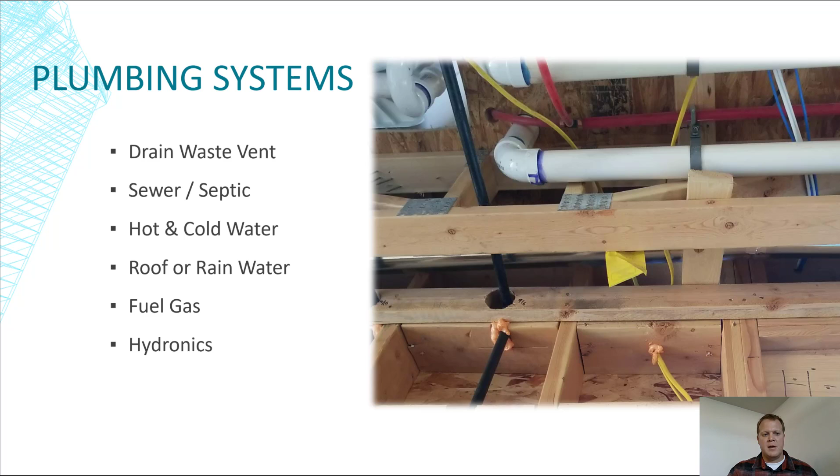I like that. I was watching a documentary about Machu Picchu, and they had a plumbing conveying system, water and waste going carved into the rock. Pretty amazing. Think of European history in college, and some of the stories where they're dumping sewage right in the streets, and sort of like the different pandemics that they had.

Interesting. Anyway, there's a long history of sewage being dumped into water bodies like rivers and lakes and even the ocean, and causing massive problems there. And obviously that's still happening all over the world. And if you're getting your water supply from the same place that you're dumping your sewage, imagine the problems.

But even closer to home, my wife's grandparents, who I love and adore, they're great people. They're in their 90s, and they have stories about having to get water from a well, and using outhouses and things like that, where there was no plumbing in their home when they were growing up as kids.

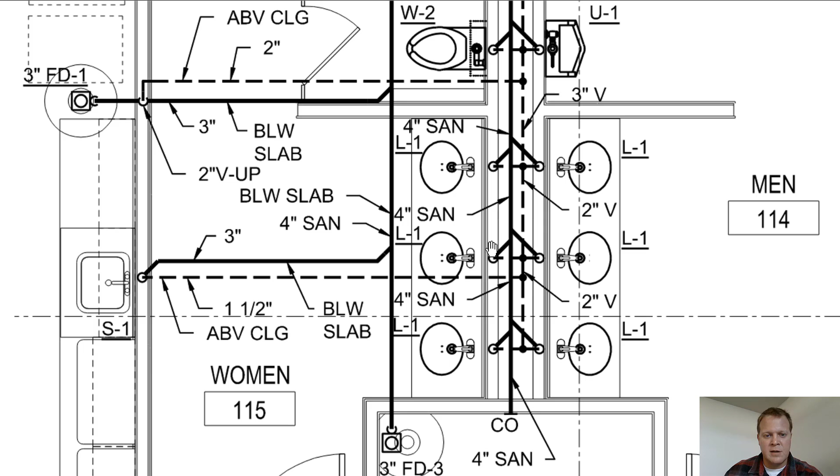And so let's just kind of run through where the highest is. And you see this CO right here, 4-inch sanitary. It does not say that it is underground, so that's above ground right there. And what this pipe right here is picking up is the lavatory, the sink. So the lavatories on each side, and let's try and zoom in on that a little bit. So the designers did a good job of drawing this in, and they spent some time actually drawing each individual little waste line there coming in here.

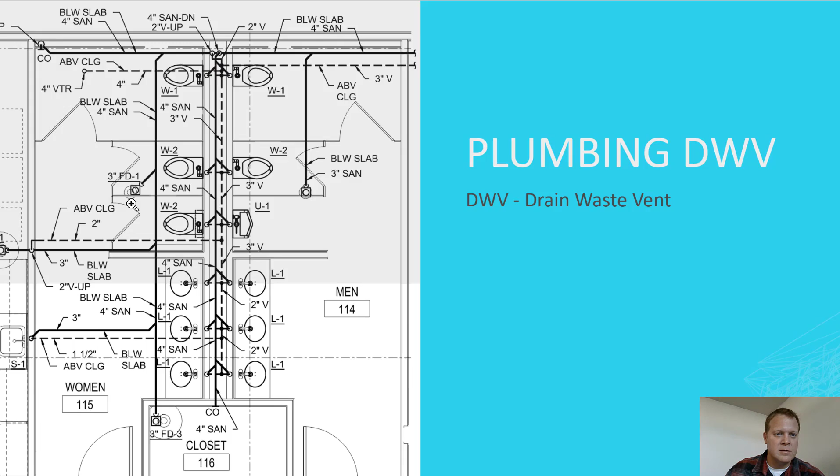And then over here in this area, they have 4-inch sanitary down. Well, that's basically saying that this is below slab, and they actually have it right here. Below slab, 4-inch sanitary. So if this pipe is below slab, this pipe is below slab. They don't have an up or down. And when you look at these drawings, they usually show an up or down, meaning a stack in a circle. And you can kind of see that right here.

So we have this guy right here picking up something. And what is that? Well, they actually labeled it well over here. It's a floor drain, 3-inch floor drain. And then what's this? Well, let's just trace it out again. We got the floor drain coming over here. If it's in the floor, this has got to be below ground. Oh, there's another floor drain over here, and then it's going to come.

So we can tell by the direction of this arrow, and there's other ways to tell, but this is an indicator of which direction this is flowing. So this is the highest part of the pipe. It's going to slope, I think usually a minimum of 1/4 inch per foot, and it could be more. And it's going this way and coming out that way. And it's got lots of different branches. Want to spend a little more time looking at it.

We've got this CO. What is a CO? And it says 3-inch sanitary up. What is that? Well, it's the end of the line, or maybe the beginning of the line might be a good way to say it, but it's a clean out. We could go look at the abbreviation sheet for the plumbing and look exactly what that is, but that is a clean out. And we'll talk about clean outs in a little bit.

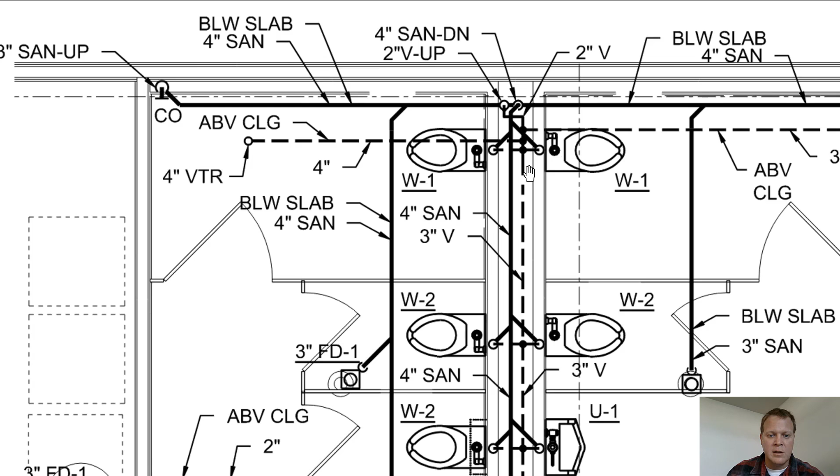This is the highest part. And so it's coming over here. It's picking up this pipe. Interesting, it's kind of hard to tell, but that's the 2-inch V up. So this is picking up some of the vent right there. And we see more water closets or toilets. I can never remember water closet or lavatory. I always get them confused. Those terms don't make any sense to me. So this is the vent.

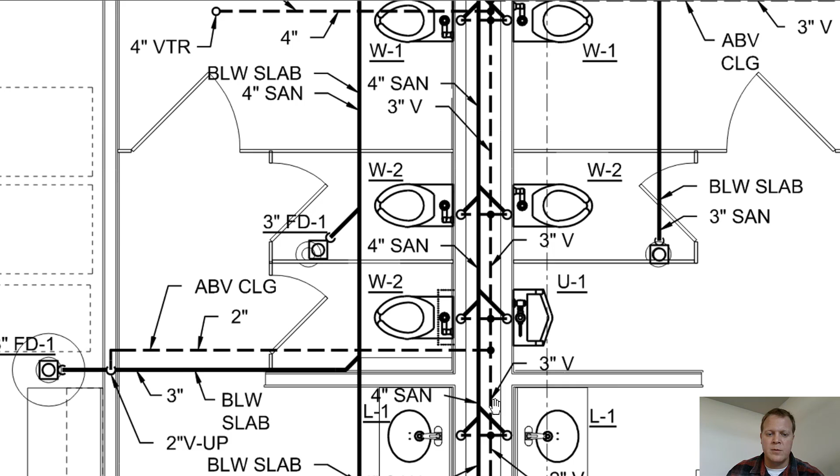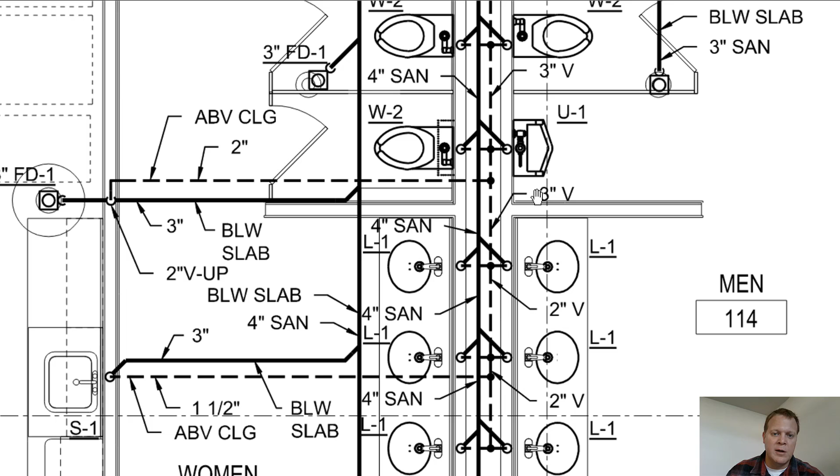So the vent is not carrying waste. Looking through this again, we have the dark line carrying waste, and it's sloped. And this waste line, or sanitary line, as they're calling it, the 4-inch sanitary line, is going to convey both. I'm going to throw a term out: anything coming out of L1, that would be somebody washing their hands, and so that's gray water. And then the urinal would be black water, but they don't have separate pipes for gray water versus black water, so they're just calling it sanitary.

All right, so what does a vent line do? Well, first thing it does is it vents the sewer gas from going into this space, and it's actually going above the roof. So this is vent through the roof. This pipe right here where my mouse is, that's extending all the way through the roof, and that makes sure that this waste line, the sanitary line, is vented out through the roof.

And you think of the water closet or toilet, there's water in the bottom of the toilet all the time. If there was no water in the bottom of the toilet, you would be smelling sewer gas right here. We'll talk about traps here in a second, but that's how a trap would be right here, and that would be how there's no sewer gas coming out of this sink or lavatory, as well as the urinal.

But in addition to just venting gas, it's allowing air into the pipe, and that facilitates the actual conveying of the water. It has a lot to do with the pipe size. There's lots of different pipe sizes, and there's all different kinds of pipe too.

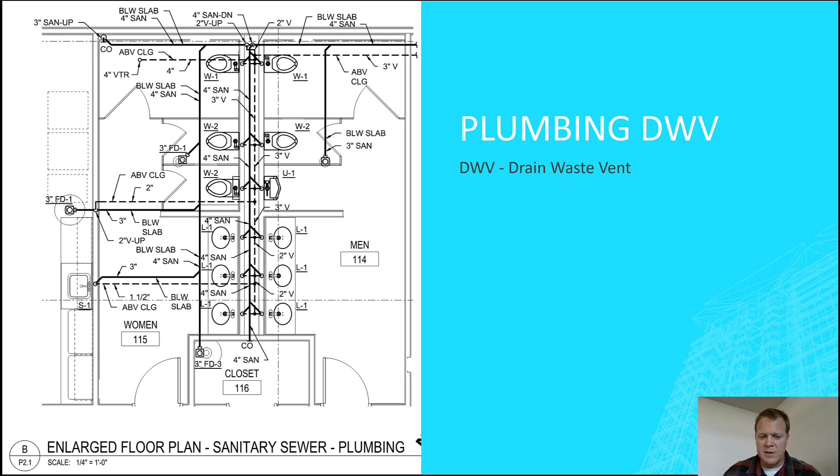All right, so we've got, again, looking at the whole system. We'll look at it here in a second, but piping materials can be plastic, copper, cast iron. I've never seen steel be part of a waste system, but I assume it can be. I don't think.

Let's just look at this as an entire system for a second. We did a diagram and looked at it from a schematic standpoint, but this whole thing is functioning together, right? This piping is part of it. We've got a floor drain here. We've got waste lines for all this stuff, and think of this as a system. This whole area is something that if one or more parts of it is not functioning correctly, not done correctly, it could make it so the whole system's not working.

And so the cleanouts, these cleanouts right here and this cleanout right here. Notice that it's into this closet right here. It's probably a janitor's closet. And so the pipe runs all the way into this janitor's closet right here. There's a little brass cap usually on it or some other cap, and they can open that up and then clean out this line if there's some sort of obstruction in it. And these cleanouts are tremendously valuable.

So going back to a previous one, a common problem is if this restroom got built and say the building didn't get occupied right away, in dry climates, these traps on the floor drain can dry out. And so you can end up having gas coming through this area right here and coming right out of the floor drain. I've been on lots of projects where an area was decommissioned or something like that, and some of the first traps that dry out are the floor drains. I don't think I've ever seen a lavatory or a toilet dry out, but I have seen lots and lots of drains.

Because when do they actually get a bunch of water, right? They get water when someone cleans the floor or there's a problem. So that's when it gets water. If the area's been decommissioned and isn't getting a lot of washing down, that's what you're going to have. It's a bunch of sewer gas coming into this space.

So that's the value of a trap. So let's just talk drain pipe size. So 1 1/4 is typically the smallest, and I don't think I've ever seen 1 1/4 really be used anywhere other than by a sink. So in a residential environment, all piping is usually bigger than that.

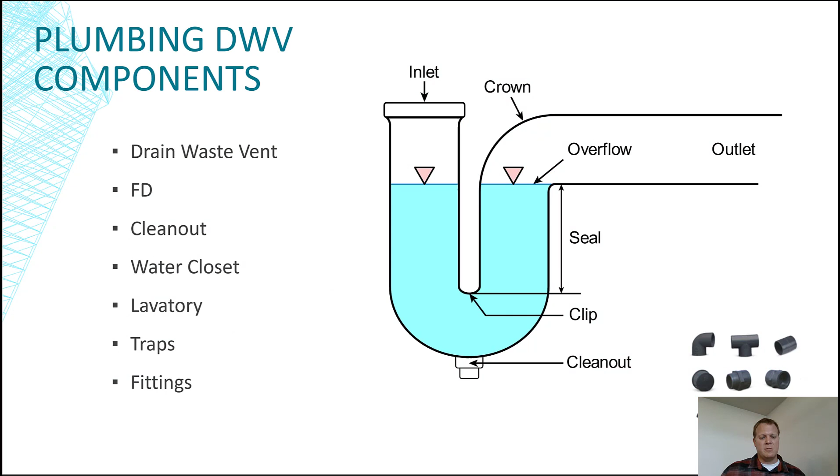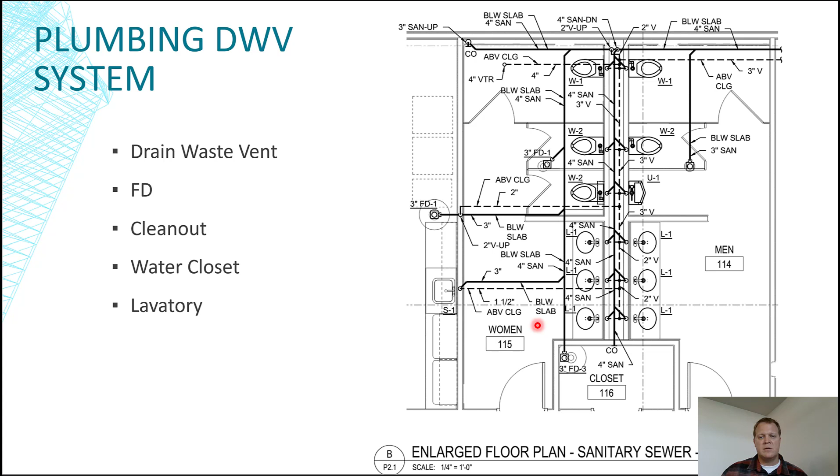Let's go back and look at that. Right, so they're calling it out here. 4-inch vent through the roof, that's the pipe size. 3-inch, that's the pipe size. 4-inch sanitary. And so this is 4-inch, here's 1.5 inches. This is a commercial project. It's not super big, but it's large enough that the designer spent the time to diagram out the pipe size. But the point being, the plumber on the residential or light commercial side would have to go figure that out.

So let's just go look at that for a second. I think this is worthwhile. I want to do this little exercise.

So I got online and I just wanted to show you a resource, and I do this frequently, so this is a good strategy. The drawings call out a sewage pump for the building. It might have a model number, it might not. Let's say I'm new in my career and don't even know what this thing is. Home Depot, lots of websites - I'm going to show websites today because I think it's a good resource. You should be Googling lots of things in this industry to try and understand it. I do stuff like this all the time, so I'm going to show it in the class.

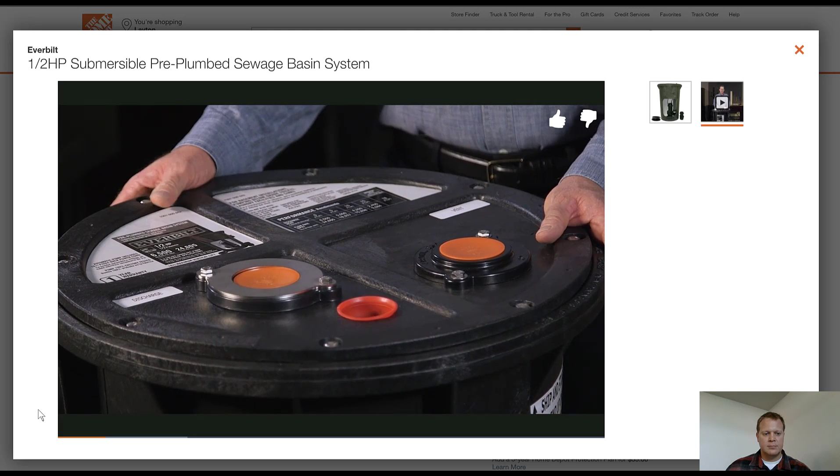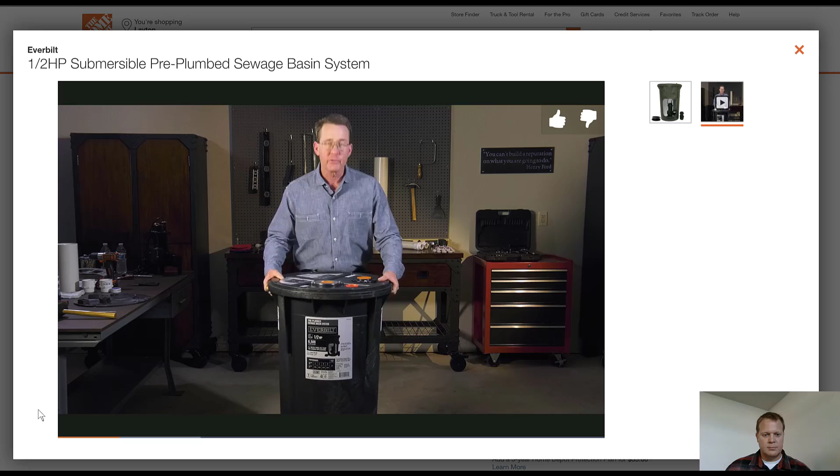Today we're going to discuss the Everbilt 1/2 horsepower pre-plumbed sewage basin system. Before I begin, I would like to advise you to make sure that the installation of this system will meet any and all of your local, county, or state plumbing or sanitary codes. The system comes pre-plumbed. All of the internal plumbing has been done at our factory. The system features an 18-inch by 30-inch structural foam injection molded basin. The basin is heavy duty. It features our 360-degree easy grab handle that allows for easy carrying of the product wherever you need to set it. First thing I'm going to do is reach in

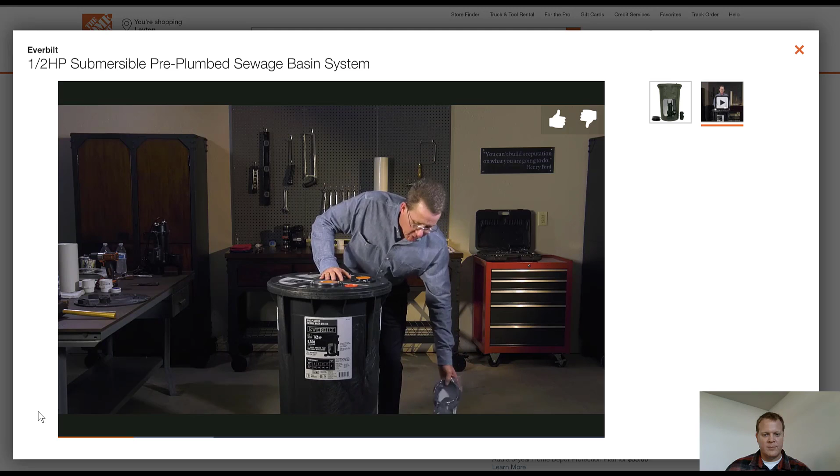to the factory pre-punched inlet hole. That looked like that kind of hurt. That hole is set at the industry standard 10 1/2 inches from the top of the basin rim. So that's where, inside of here, I just grabbed that out.

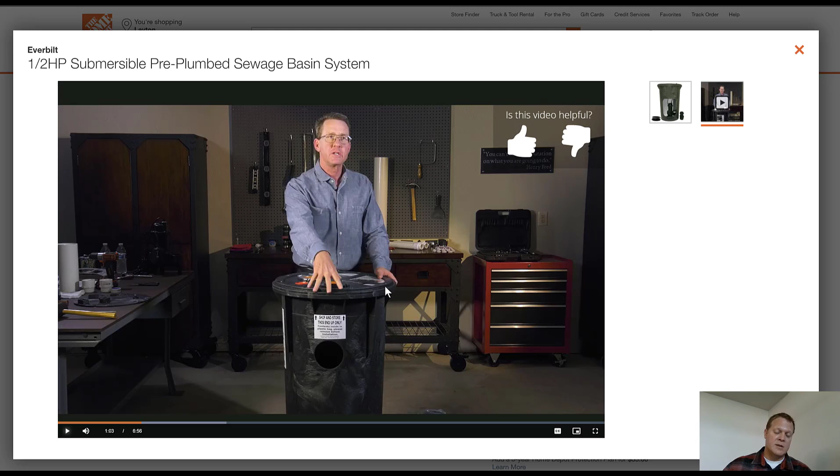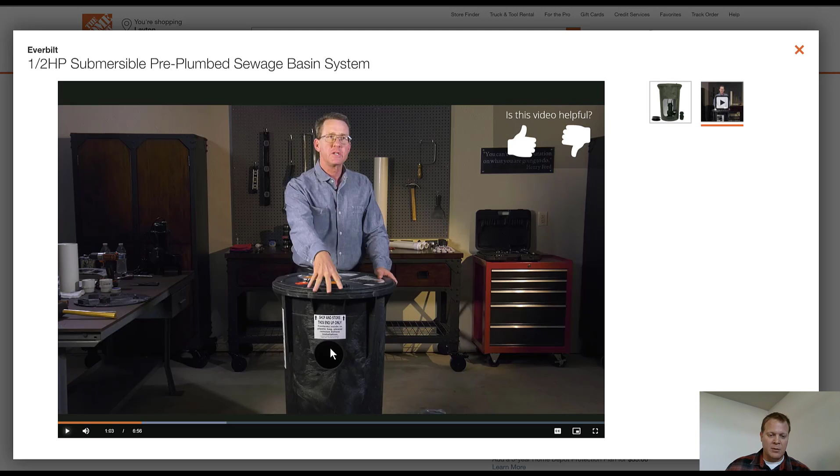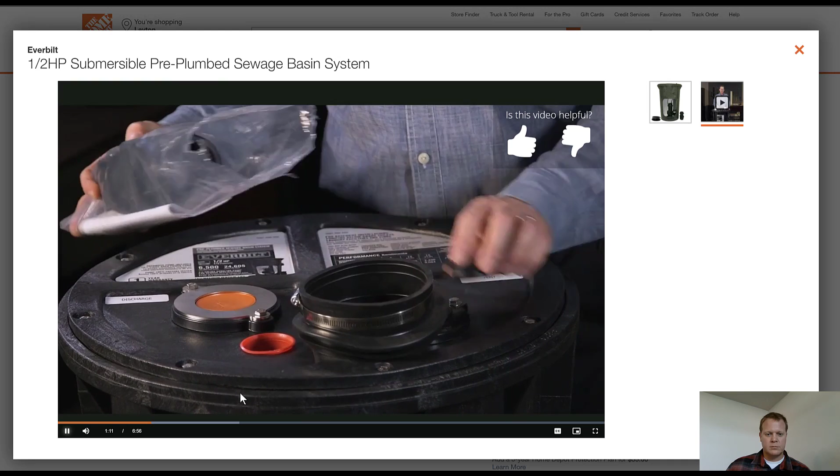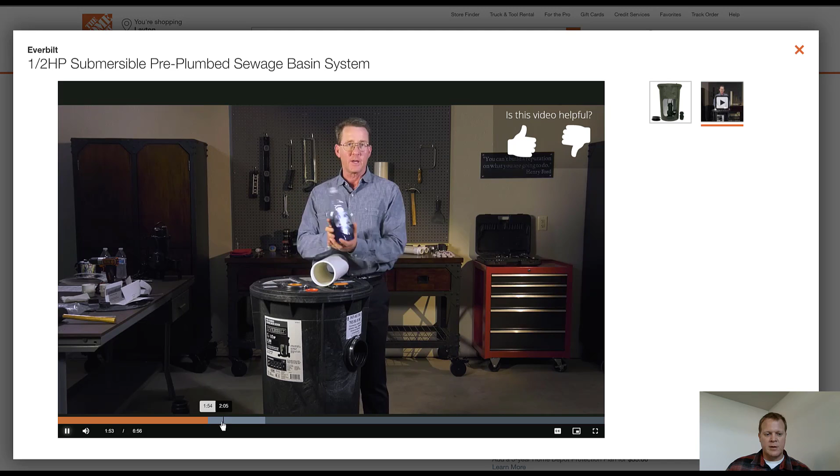Inside of here, I just grabbed out the accessory package. We're going to set some of the accessories aside. A 4-inch pipe collects your wastewater from your toilet. We provide a watertight as well as a gas-tight seal to the 4-inch pipe, installed with lubricant. Okay, cool.

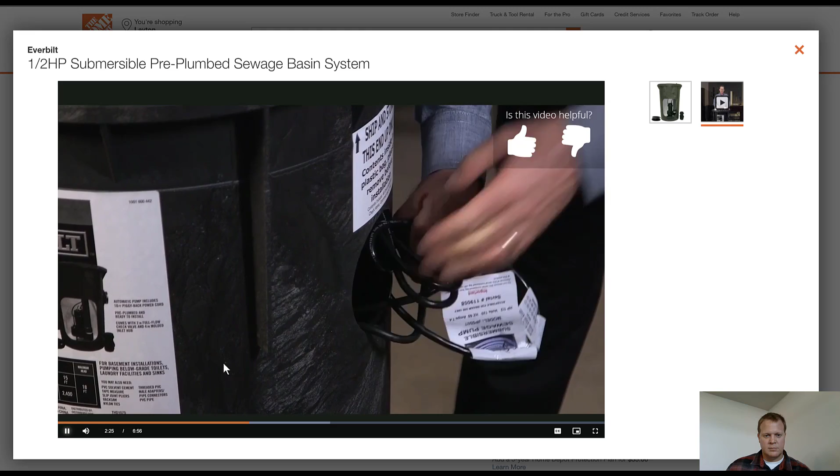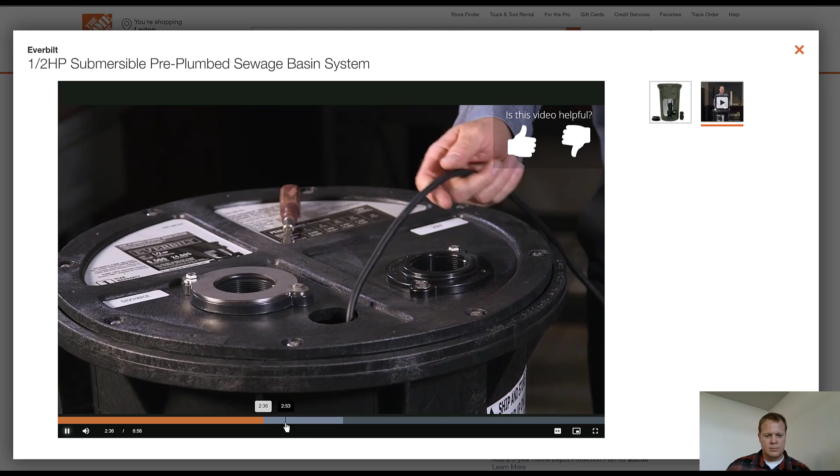Once those are out, we want to reach our hand into the 4-inch inlet and grab the 10-foot pump and piggyback float switch cord. You want to grab one of the cords, pass it through the cord grommet hole, pulling all of the slack, reinsert the grommet. A few taps of a rubber mallet will assure that, as well as plumber's putty.

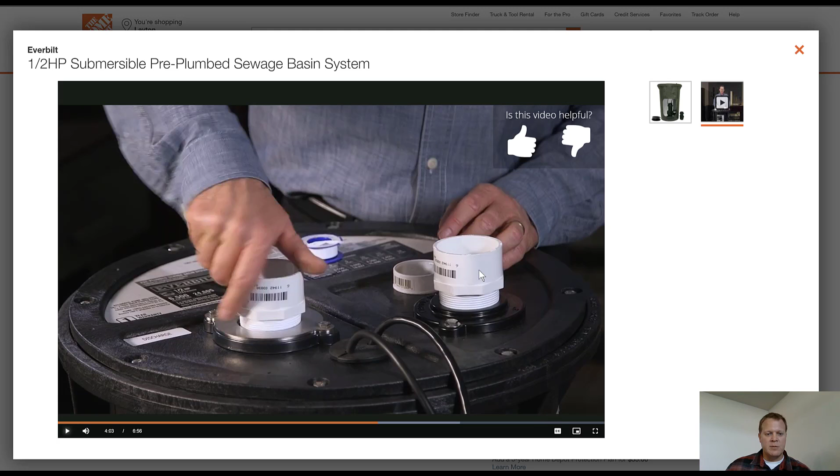All right, so this thing's got a pump in it. It's got wastewater coming in. Obviously, one of these is going to be the vent, one of these is going to be the outlet.

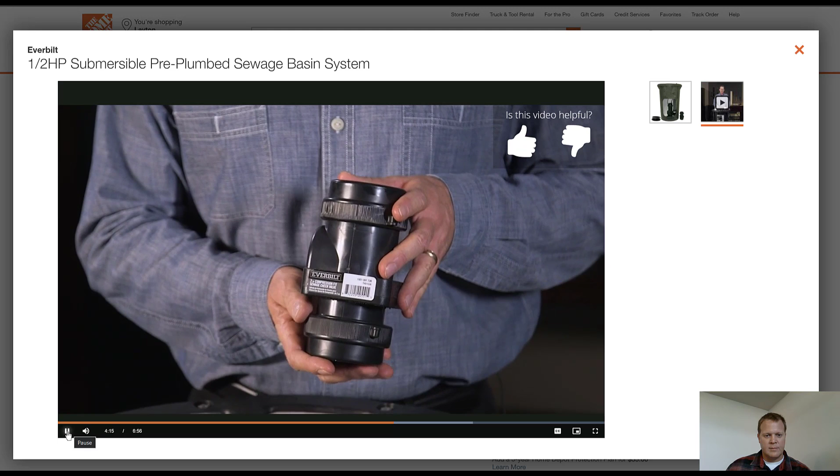Plumbing the system is as simple as that. Included in the accessory pack is the Everbilt 2-inch heavy-duty ABS sewage pump check valve. This is a compression fit check valve and it will pass a full 2-inch solid. This check valve is installed at the appropriate location on the discharge line.

You guys follow that? They're basically saying that it's a one-way valve. If the wastewater gets pumped up, you don't want it to then immediately come back down into that basin and start the pump cycle again. So that check valve's making sure it doesn't come back.

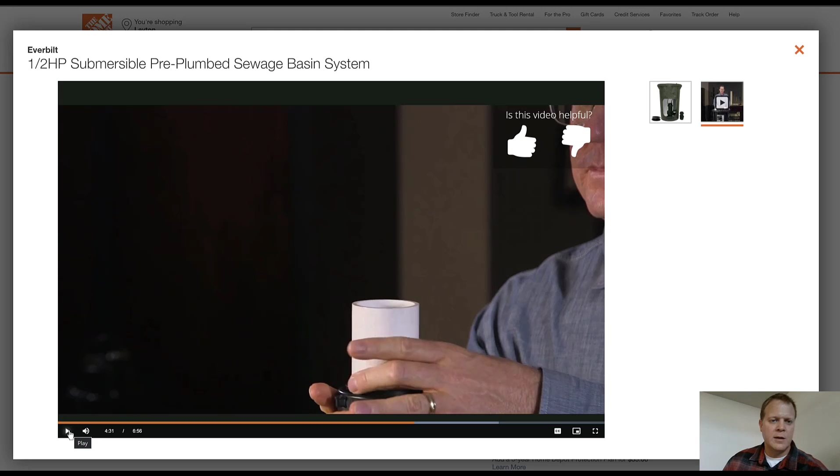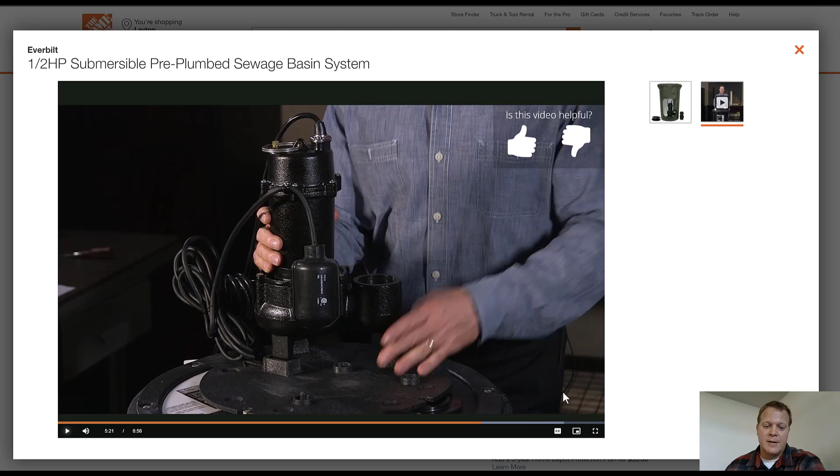Anyway, I do stuff like this. There's no way to know all the industry stuff in our industry, so heck, this is just an example of stuff I've done in the past. There was one point in time where I had no idea what a submersible pre-plumbed sewage basin system was. A little bit of Googling - Home Depot's got a nice little video. Hopefully people aren't too mad that I showed that.

So going into the next topic based on that previous drawing, what coordination issues and sequence issues do you see if we needed to build a home or commercial project with a sewage pump?

I'm hoping you're thinking that underground plumbing is typically below the slab, and we better measure the flow line of the sewer and check it against the flow line of our waste coming out of the home or commercial project. Sometimes those aren't calculated right on a residential project with 8 pages of drawings—you're never going to see that calculated for you. So you've got to get the flow lines and do the math to see if it's going to work.

You get the plumber involved, maybe a utility contractor if you need help, but I'm hoping there's some coordination. If that needs to be done, we need one of these things—there's concrete, and we'd locate the top of slab here. So what are we going to put around this thing? We've got to dig it out. There's excavation, and a bunch of little things going on for coordination. There needs to be an electrical source nearby too.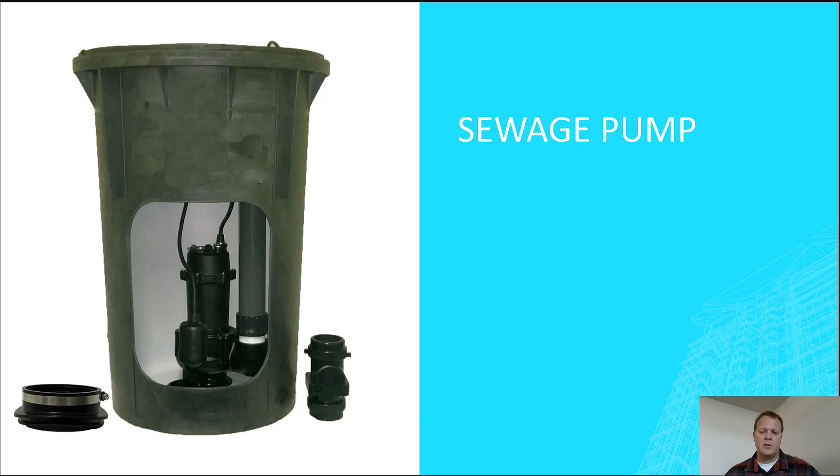So getting back to this idea and thinking through coordination logistics—in the previous lecture I showed there was a footing right here. We would have wanted to coordinate this line because it's below ground.

We wanted to make sure that if we're talking about coordination with earth, and we've got to dig right here, where are we going to put the spoils? We've got pipe that we've got to coordinate in this wall.

A little bit of finishes to coordinate right there—the slab on grade floor finishes. We've got to place this floor slab in these restrooms, and we need the floor to slope to this drain. So there's coordination needed with the height of the floor drain, because we want the floor to drain to it.

Now imagine we decided to slope from this corner and this corner over to here—that's a pretty long run. So how deep does it need to be? If we didn't do this right, you could end up with a pool of water right here on this wall. So you've got to think through those kinds of things with where this plumbing is going to get set.

Make sure people are coordinating, including wall finishes and things like that. If we had a clean out on this wall, but there's also some sort of mop sink, and a lot of times you'll have an FRP panel in this entire closet, maybe we need to do something there to make the clean out work—wall finishes and fixtures all need coordinating.

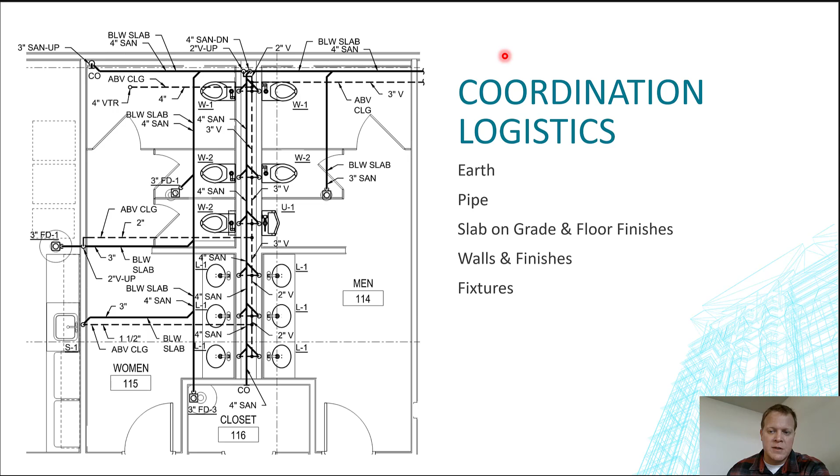But quite a bit of area is actually quite rocky or too clay, so they need to bring in sand or pea gravel to bed the pipe. They lay this underground pipe on something and get it to the right elevation. The excavation is usually just a trench, but then they put in sand, pea gravel, or other material to create the elevation for the pipe to sit on—that's called bedding. They usually use sand or pea gravel because it's self-consolidating.

So if we're talking about some of the things we've talked about in the past, what's the sequence? Deepest to shallow, right? So say we coordinated this footing, and the footing that's here is gone. Well, deepest to shallow might mean you're going to start down here on the side of the building and dig this way. But the waste line might not be the deepest thing, but it's definitely going to be one of those things you need to think about.

It usually is one of the deeper things, but it might not be. So in the wall, we've got to think about how we're going to do this. Are we going to do the studs first? Are we going to put the piping in first? Is there a big thing where they have some things where they prefabricate...

All this piping right here, and put it on a skid. It's a nice way if you have a lot of these in a building to be able to do these quickly, because there's a lot of piping right here. They could build this entire piping system on a skid in a shop and then bring them out. And if you're doing that, then you definitely don't want the studs there.

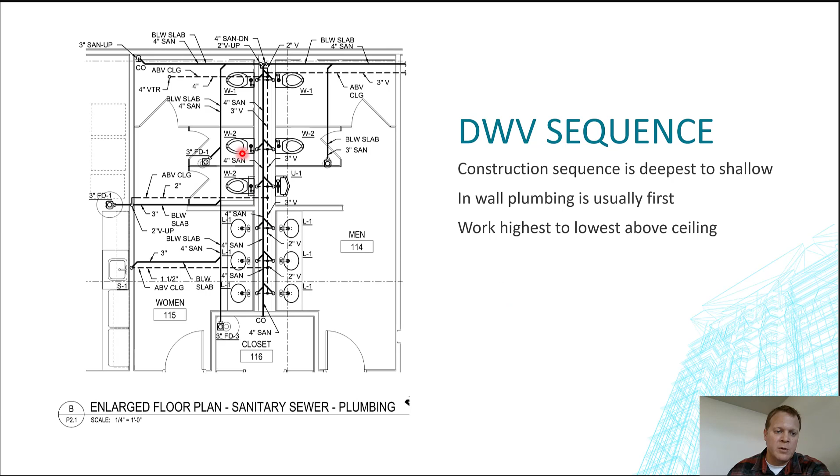So thinking through some of the sequence, I listed the common ones again, right? Remember, sequence is most often deepest to shallow. Plumbing would need to go before electrical. And so work highest to lowest. So this is something that's high, and it's going to go all the way to the roof.

But obviously all this can't be done at one time. It's going to be coming in different phases of the project. You're going to do underground plumbing, pour a floor slab, and then you're going to be doing something else like walls and in-wall plumbing. Eventually you're going to be going through the roof. But I'm going to bring that through.

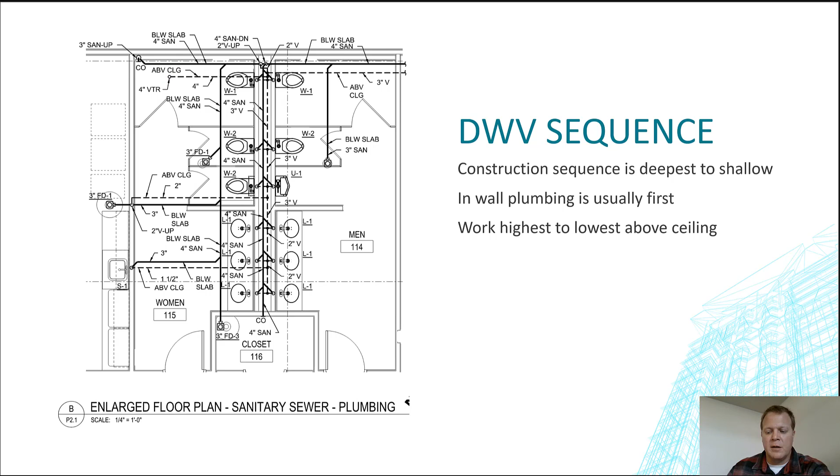All right, I want to talk about common coordination issues. Let's go show this and this. We already looked at it. Yeah, let's go look at these in Bluebeam, in their drawings.

And we'll look at fire rated assemblies on this one. So Hilti's a fire stop, I think fire stop. Oh yeah, it's right there, fire stop. Hilti manufactures a bunch of this. But a common issue is the fire rating penetrations that plumbing causes.

So if you have, say, a multifamily project, let's just go bring that up right now. Think through this detail right here where you have a pipe going through a wall, and they've got two layers of gypsum that needs to be fire stopped around it. So that's what I'm talking about, is a pipe going through the wall, and it's a fire rated assembly. The wall is.

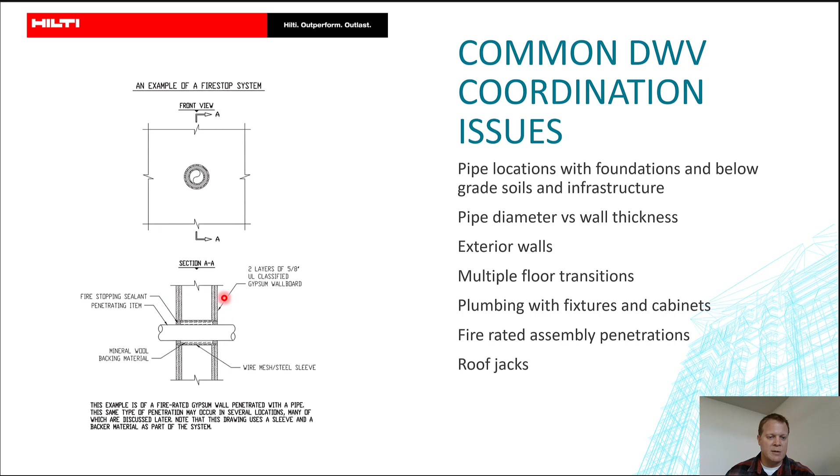We're looking at the multifamily project that I bring up frequently. So just look at this as the second floor of this series of apartments or townhomes or something, right? Let's just look at this, this is the second floor, level 2. This is the third floor. And let's just pay attention to the last unit. All right, here's the third floor, here's the second floor.

On the third floor, we've got a bunch of plumbing right here. So we've got drain waste vent that needs to get to the sewer. How is it going to route? Well, you can't go this way necessarily because you're going to be in an exterior wall. And if you did that, you can't put plumbing in an exterior wall without... Anyway, that's not a good route.

So you're probably going to come over here, try and get in this wall. This wall is fire rated because there's a zero lot line between the two dwelling units. So this right here is a fire rated assembly, and any pipe penetrating anywhere in there would have to follow that detail. And I bring it up as a common issue because I don't think it's well understood in the construction industry, really by any trades that really understand well the fire rating system.

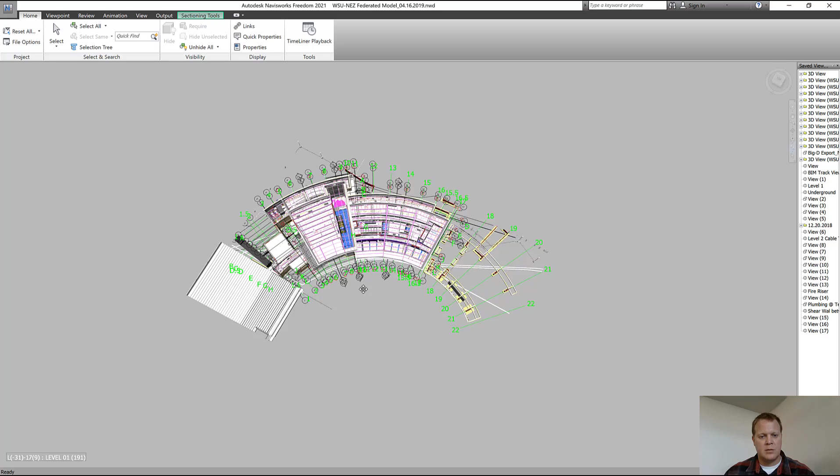I said pipe locations with foundations below. Let's bring up Navisworks and let's go look at this project from below. Ooh, coming out of the sky.

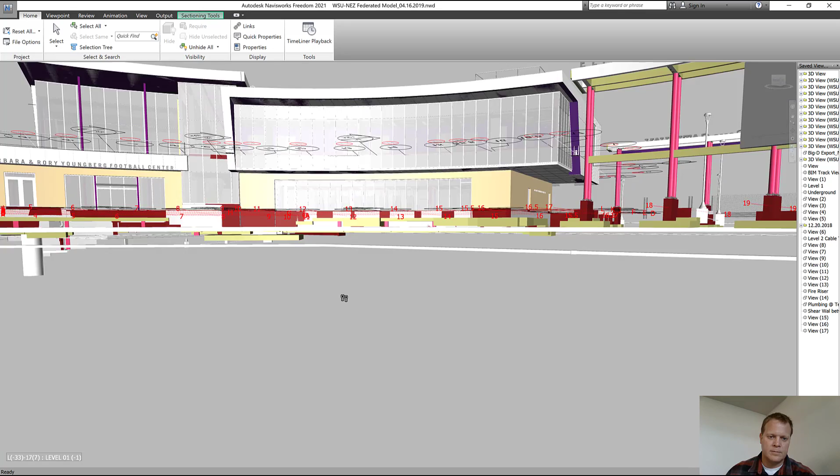Cool, look at that. So all these red things, those are all footings. We've got below slab plumbing here, maybe a little bit of a conflict there. We've got all kinds of plumbing line. These are probably electrical lines, my guess, but got plumbing all over the place.

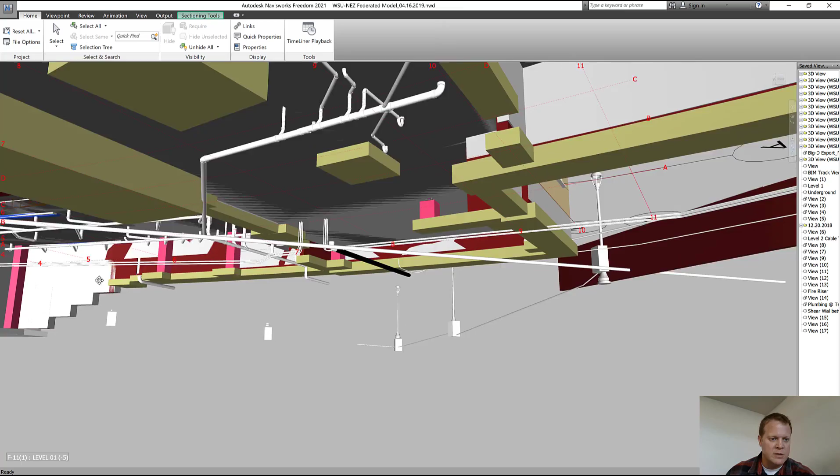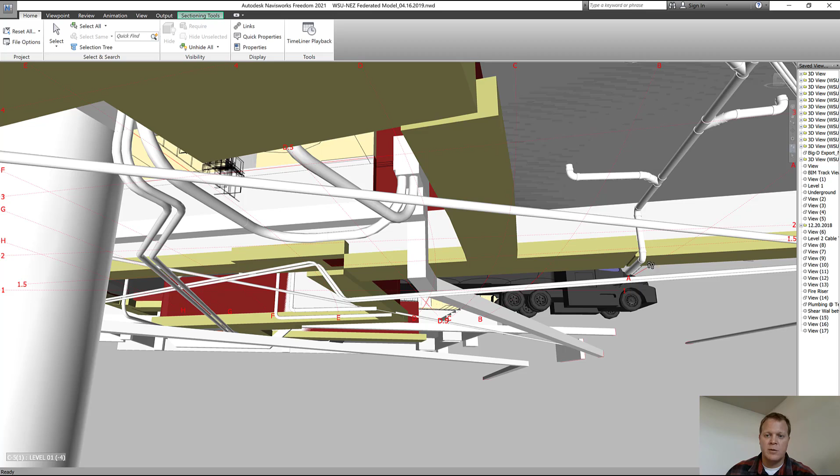So does it coordinate well? This whole area seems to be just fine. We go grab that guy. Well, we're getting close there. They're going to get it. Let's go look at this. That's probably electrical. So we've got a lot of stuff underground underneath this building that has got to be coordinated.

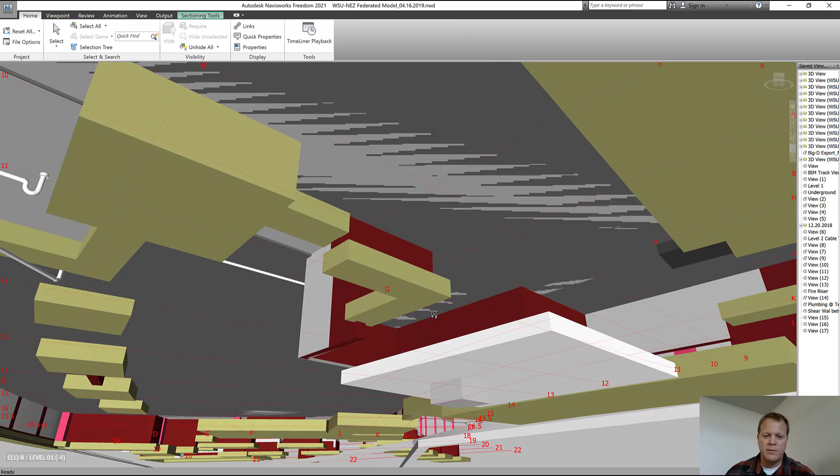And I bring this up, I think I brought it up in my first coordination topic, was underground plumbing as a good thing to understand that we need to coordinate. But I think this is a good view that you can kind of see there are footings and there's all kinds of stuff underground. And I think it's commonly missed, meaning out of sight, out of mind, maybe. I don't know. But maybe it's more common to think through the coordination of the in-wall.

I don't know. But it feels like this is a common issue that, one, the designers don't necessarily collaborate early on and think through, but underground plumbing and whatever else is below slab oftentimes are in conflict.

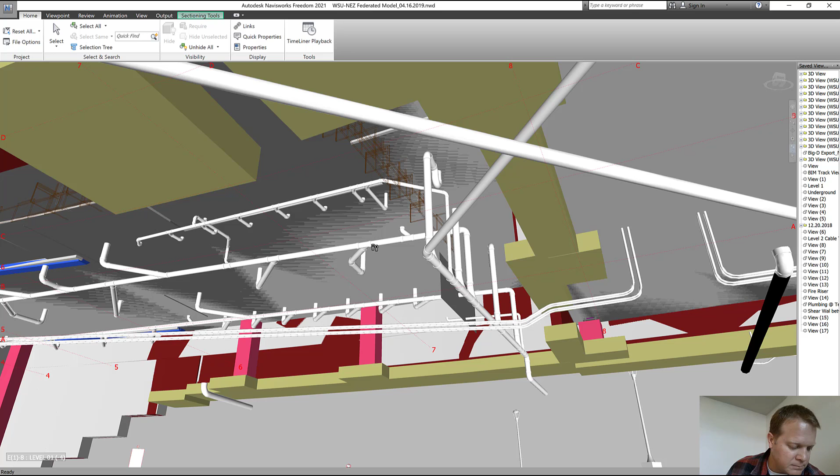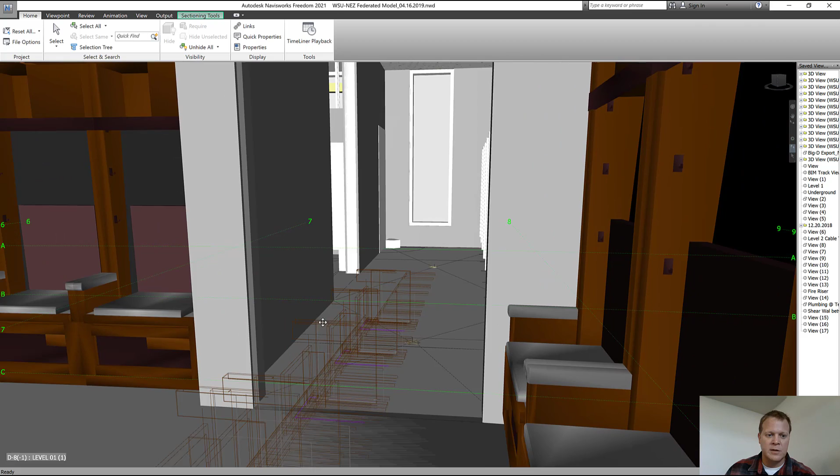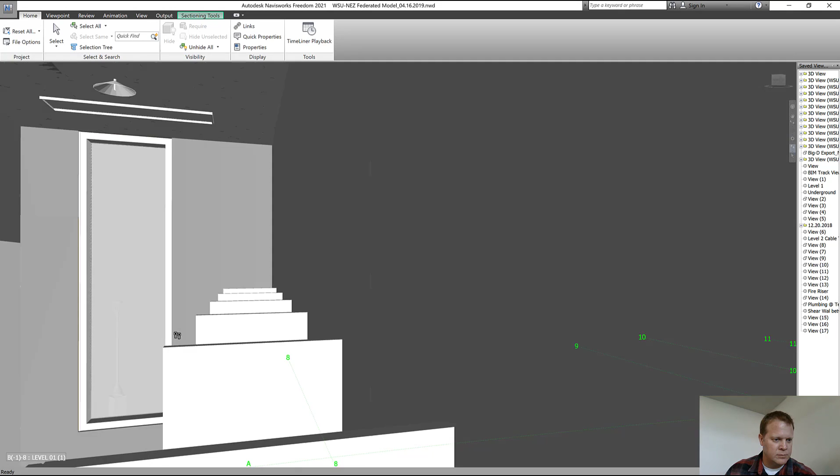All right, let's go up. Let's see if we can get this thing to. Let's try and walk over to where that plumbing is. Aha! Plumbing. There we go. All right, cool. We are in what appears to be some sort of locker room. Yep. And there's some urinals there. So let's just talk. Let's do this.

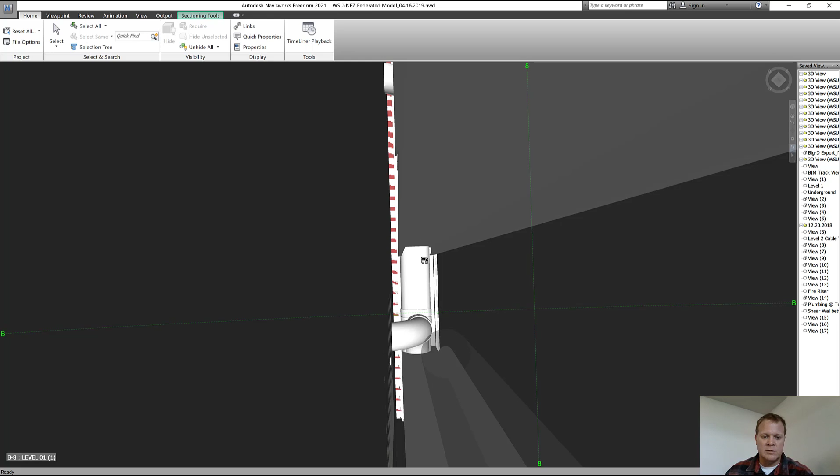Navigate right into the wall. Wall right there. Cool. Isn't that amazing? They put the pipe digitally in the wall. And does the pipe fit in the wall? It's so common that the piping, remember how as you go higher, the piping can shrink because there's not as many drainage fixture units, or farther away or lower, as more fixtures get onto the pipe, the size has to go up.

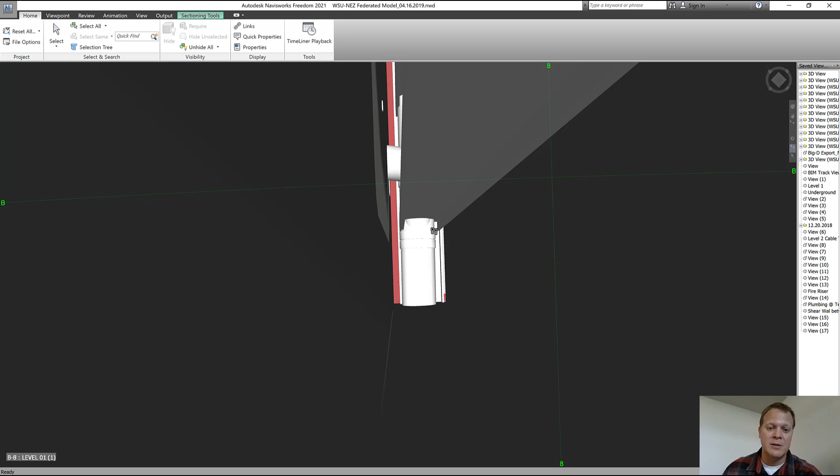And so if you know that that's kind of the rule of thumb, just go try and find the piping that's farther away and go look at your wall types and see if the plumbing actually fits in the wall. And it's pretty common that it does not fit in the wall. So that's another common issue.

Now let me go back to Bluebeam for a second. Let's bring up, let me put this, now we'll just draw it right here. Let's just say for a second this arrow represents the drain line coming down the wall. And it fits in the wall. That's the sill of our framing. Here I am trying to make this thing perfect. Okay. We got a pipe coming down a wall.

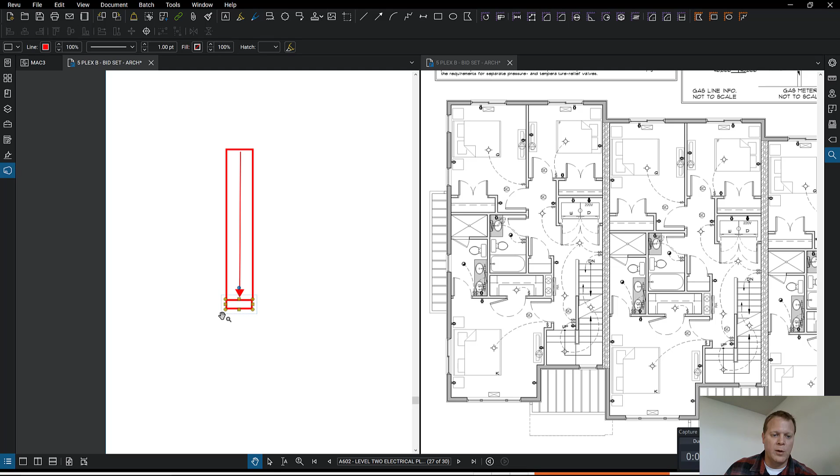Now let's say this is a bearing wall. And so we'll draw in subfloor. There's the subfloor. And let's say, for instance, we got a glulam beam holding up these joists. Hopefully you see the assembly that I'm trying to draw here. All right, that guy right there is our waste line. Whoops, that's not what I wanted to do. Sorry, guys.

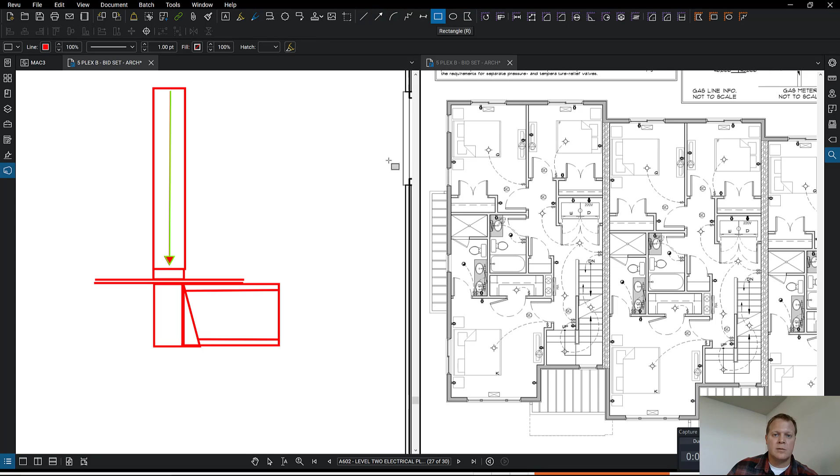So it's really common that there are coordination issues where you have a 2x4 wall or 2x6 wall, doesn't matter, maybe the pipe fits in the wall, and it's 2x6, and it's a bearing wall, and right below it is the rest of the structure. So how is this pipe going to get through this and back into the framing that's below it? How are we going to do that? Well, that's going to be a real challenge. It really is, and it's pretty common that you have these kinds of problems right there. Well, I was trying to draw that, anyway, harder to see.

That's one issue. This could be replaced with an I-beam as well and a concrete deck. And it's super common again where you have steel studs that just happen to line up with an I-beam down below. Maybe there's a concrete slab on deck, I-beam right below, and you've got the expectation that the plumbing is going to go right through. Common coordination issue.

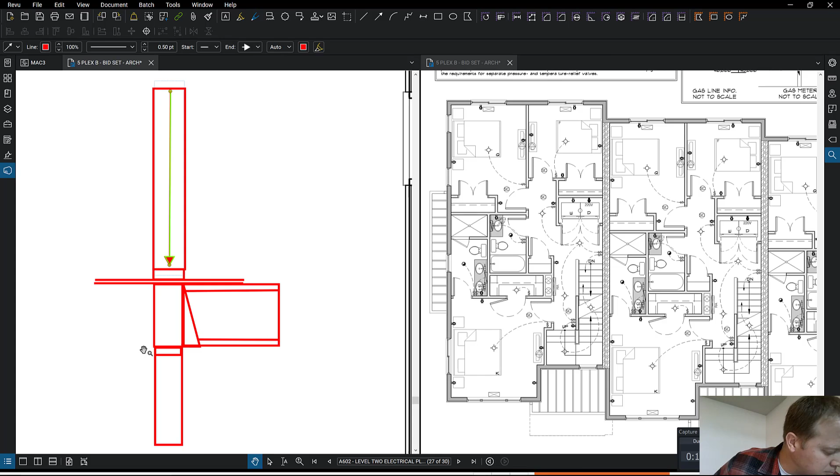Okay, so the plumbing issues that frequently happen are when, say you have a cabinet right here, and the plumbing, the drain waste vent, is going to have to come up this wall, and you're going to have to get it all the way from here to there. Well, you have something in the way, like a stove. That's going to be really a challenge to get something over here. So you have to figure out a different route.

But one of the specific things is when you get into cabinets and floors that don't stack vertically. So look at these two floors right here. This is level 2, this is level 3 of the same unit. This is right above that.

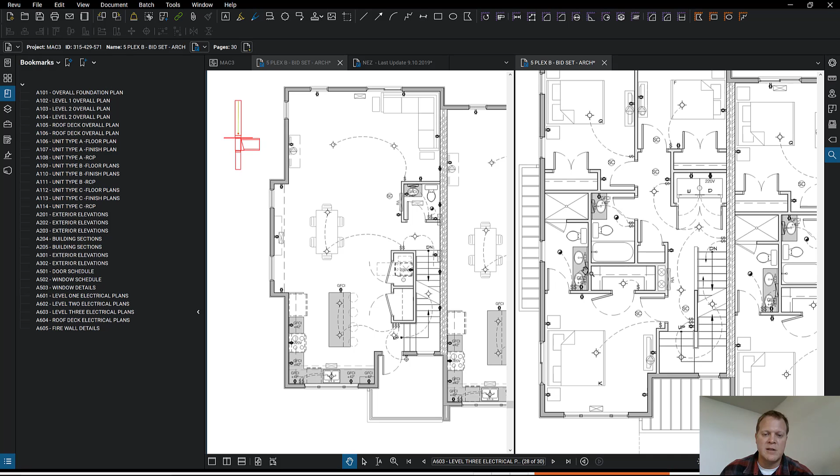And it can be a real challenge getting the plumbing to line up exactly right, especially when people are making changes in the drawings. So imagine a plumber, and there being a cabinet right underneath here. This is a perfect example too. Let's say the plumber split the difference and put the waste vent right here, the waste line right there, and that could be the middle of two cabinets.

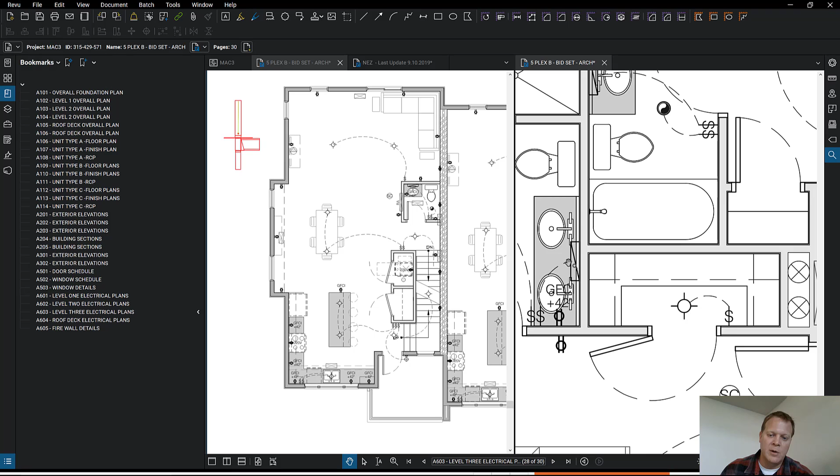And if he does it right in the middle, then as it comes out of the wall, the cabinet is going to get split. So it'll have a drawer over here. Let's say you had another cabinet over here, and I know that there's drawers in here, but that's not making sense. But here's a sink. I just picked this up just to try and show it. There's a sink next to each other, kind of like this is what I was trying to draw.

And the plumbing comes and hits the midpoint and busts out that cabinet wall right there, and it just looks terrible on the inside. So as soon as somebody opens up the doors, it just looks awful how destroyed cabinets can be because of how the plumbing was routed. And it can be very difficult. So spending some time coordinating that is worthwhile.

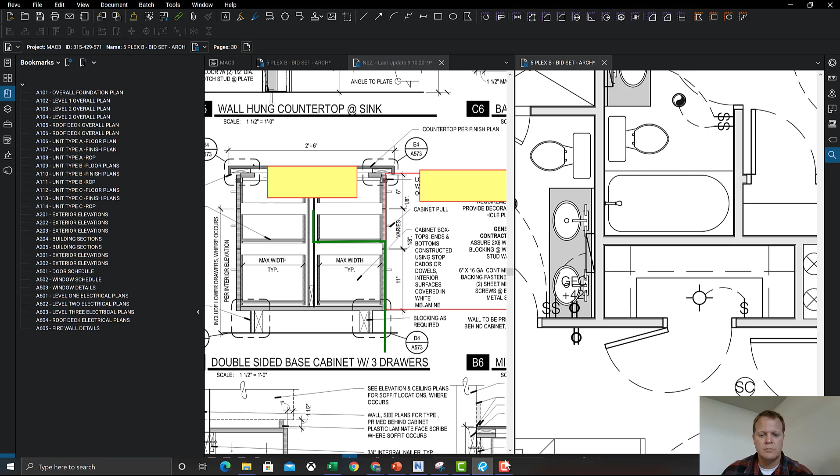Okay, moving on past coordination of drain waste vent, let's get into testing. We need to perform a test, and we talk about the authorities having jurisdiction. On the commercial side here in Utah, it's very common to see a jurisdiction require a test like this be witnessed by one of the jurisdictional authorities. I don't know on residential whether this is super common to be inspected or not, but on commercial it is. But we need to be testing the line before it is covered up, concealed, typically meaning before you put insulation in the wall.

And this is a good point. So how this works is you have a picture of this little balloon that gets put into the pipe, and you usually put that at the floor line. Say you're trying to test that multifamily building, and you want to test the third floor plumbing, make sure that it's going to pass. You would put this in at the floor line of the third floor in the waste line in the vertical stack, and pump it up, and it creates a blockage.

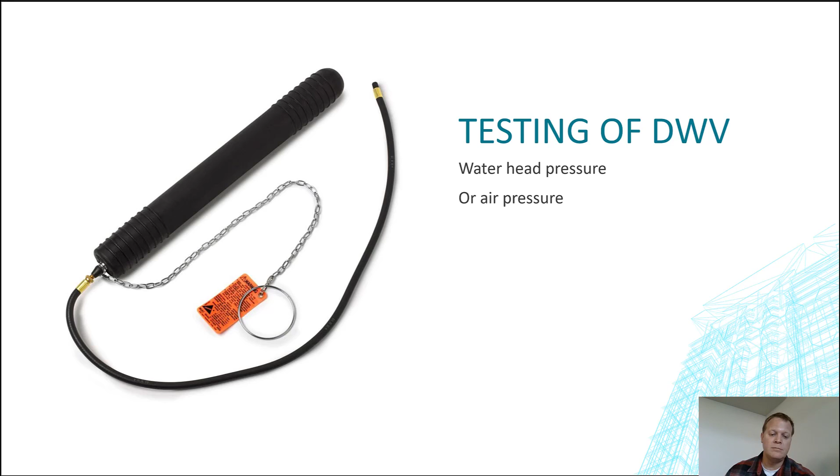Let's move on to sewer and septic. They're not going to be too deep here. So I think everybody knows what a sewer main is, right? I'm hoping anyways. And I don't have a lot to say about the sewer main because this is mechanical, electrical, plumbing. And I already said it in that the coordination issue is really trying to make sure that the sewer piping on the outside, which is designed by the civil contractor, and the plumbing waste line designed by plumbing or mechanical designer. I'm not sure exactly who actually does that sometimes, but mechanical engineer almost always.

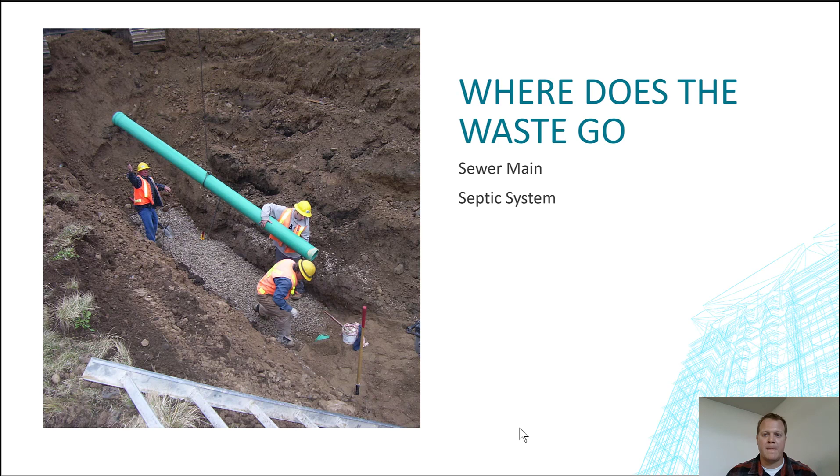So anyways, the point being, having those coordinate is the issue, but the septic system's a little different, and I'll tell you about that in a second. But one thing I wanted to bring up that is super common is blockages in pipe, and I already talked about it from a cleanout standpoint of someone putting something in a finished product, like I said about that assisted living place that they're putting things down the drain, and then it clogged the pipe and we were constantly coming out for warranty.

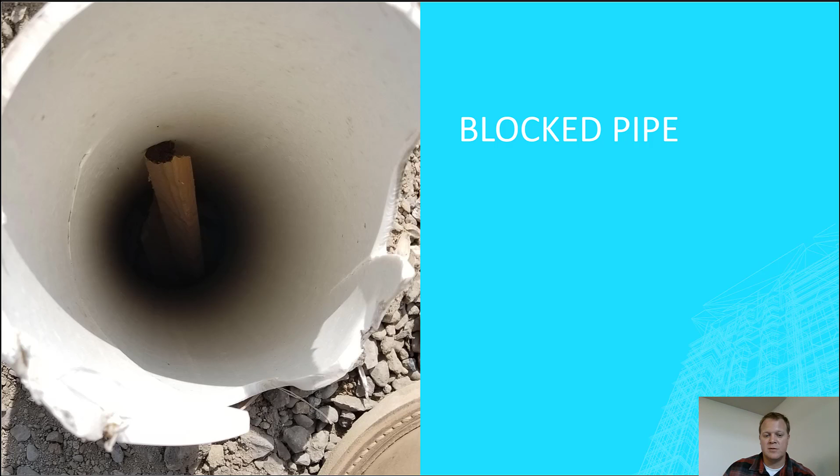So this is what it looks like when this is a roof drain pipe going to the storm drain that is blocked. And I talked roof drain and I'll talk about it later, but I didn't have a picture of sewage, but I had a picture of during construction, the roof drains start to get hooked up on this building. Our piping down below this level is blocked by gravel and some other dirt that pipe got filled up with.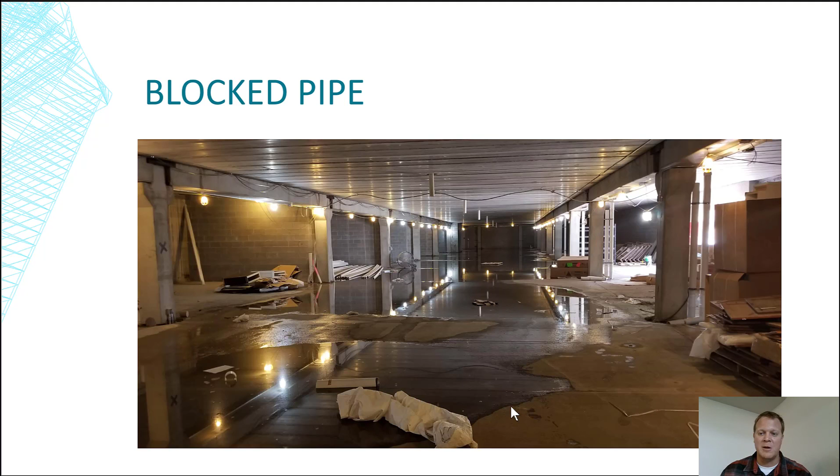And look, we get a rain event, and the water on the roof comes down, hits that pipe elevation, and then backed up into the garage. This is not rainwater that came into the garage. This is rainwater that came down the roof drains and backed up into the garage because that's the level, that's how much water was in that pipe. It just needed to go somewhere, and this is the lowest elevation it could come out. Pretty interesting stuff. Got to pay attention.

So, what is a septic system? Typically, most municipalities are sending the wastewater to the sewer, and some are going into a septic system. And I think this is worthwhile showing a typical septic system. And so we have our wastewater from our house or small commercial project coming in here. You have the sludge filling up down here. You have these little baffle systems in there to be able to keep the things that float on one side, and you keep the sludge on the other.

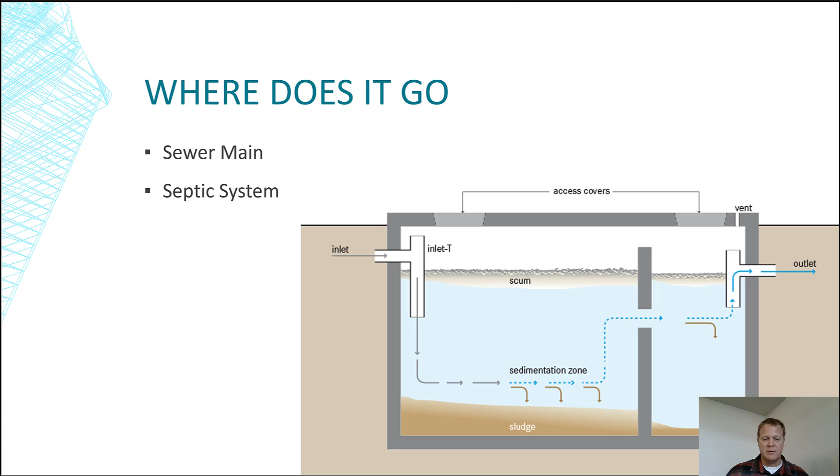This will eventually have to get cleaned out. But then you get some fairly clear water in this location, and the clearer water will come out and go to a leach field of some type. So that's your basic septic system, and you can see the access covers and stuff, and they'll eventually have to clean these out. And I don't want to get into the microorganism stuff that breaks down all the stuff, but anyway, lots of cool stuff happens on a chemical reaction level or microorganism level. I'm not that type of person. I don't know all those details.